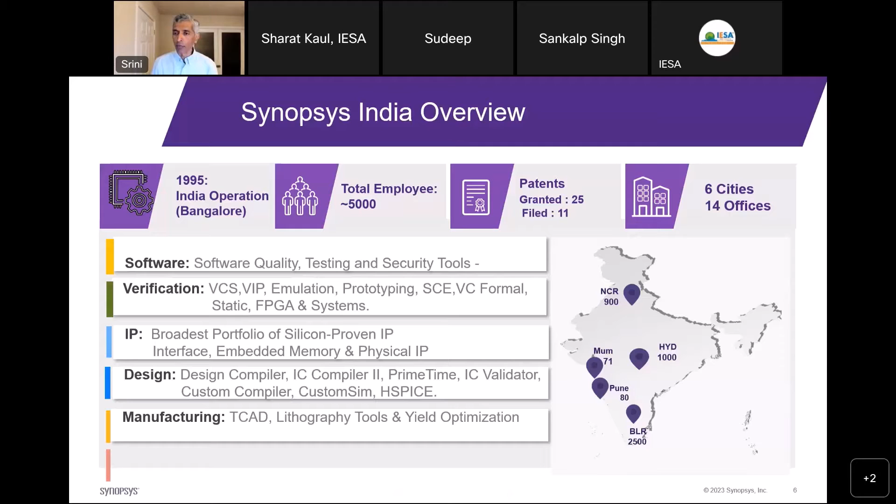You can also see that we have offices throughout India, and we can see the headcount in each place. We are very excited about the contributions that the Indian team has made to EDA and to Synopsys' success. I think it's also appropriate now that Synopsys, in turn, participates in India's new initiative to become a semiconductor manufacturing powerhouse.

The thing that's unique about Synopsys, that will make Synopsys a good partner for all of you considering any kind of manufacturing, is that Synopsys is a full stack supplier in EDA. Everything that you can think of in EDA, you can get from Synopsys, from design capture all the way to silicon manufacturing, everything in between.

And now we are working on what we call hyperconvergence. How do we bring these technologies together so that we can offer a better solution to our customers, and how we can use the power of pervasive AI to make each of these tools better? That's our quest right now. The whole company is focused on this and executing really well on this stuff. And as you begin to engage with us on manufacturing, you'll begin to see some of the benefits of this approach we've taken.

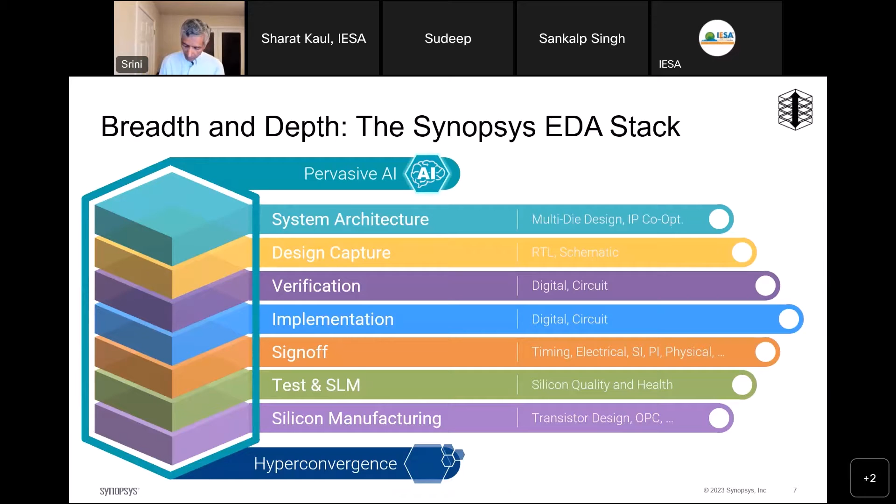Let me tell you briefly about Synopsys manufacturing solutions. It's a very large area, so I'm not sure I'll do justice to everything. But let me just high level tell you that you can think of manufacturing solutions as being composed of four important components. TCAD is number one, and you'll hear more about that. TCAD is what you use to actually develop your process.

Mask fabrication. You know that before you begin to make your wafers, you have to have a mask, and I'll explain more about that. It's a very important, very challenging technology that Synopsys is one of the leaders in, and we'll tell you more about how that works.

Silicon lifecycle management is the process by which you can keep track of your silicon as it goes through manufacturing, but also when you ship it into the field. Even when your customer is using it, you can monitor it and decide what to do to mitigate any potential problems. So that's silicon lifecycle management.

You need that. And finally, you need process control solutions to run your fab efficiently, right? You're now beginning to see discussions of fabs being built in India. The fab is built, it'll require a process control solution because a modern fab costs billions of dollars, and it has several hundreds to 1,000 pieces of expensive equipment, and all of this has to be efficiently managed, and that is done by our process control solutions.

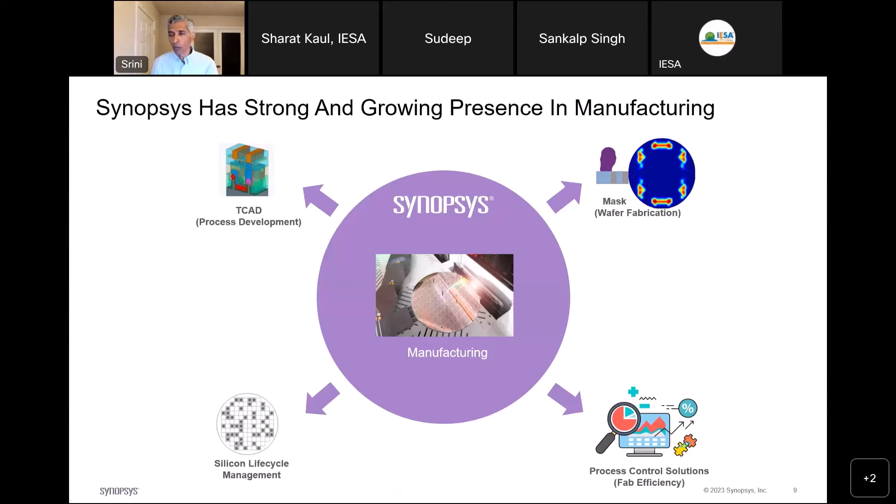So think of this as the introduction to our portfolio of tools to manufacturing, and allow me to now tell you a little bit about how all of this fits together. For most people who have designed chips, and that's the bulk of companies, right? Fabless companies are more numerous. When we think about manufacturing, think about designing a product, testing a product, and then going into manufacturing, right? So let me get my laser pointer so I can point you to what I'm talking about.

So typically, you design your product, you test your product, and then you give it to a fab, a manufacturer, where you have what is known as a product ramp. This is a curve that you're all very familiar with. Almost always, when you start manufacturing your chip, the yield is low, but very quickly it ramps up, and this part is called product ramp. Most people are familiar with it.

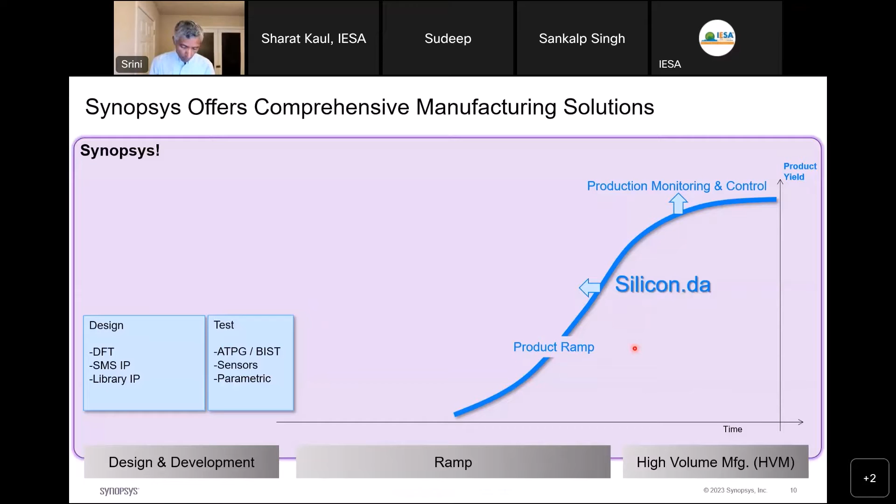But we should be aware of one other thing that is just as important to manufacturing, which is the idea of a process ramp. What is process ramp? The idea is that you actually design a process. By process, I mean something like a 28 nanometer node or 40 nanometer node, silicon carbide technology, silicon, SOI technology. These are different processes, right? And if you are in the manufacturing business, you have to develop this process. That development happens using TCAD, where you can do material design, research, process development.

Then you go into lithography, where you decide what kind of lithography to use, and I will explain more about that in a moment. When you're ready with a process that looks ready for production, you go into the fab, and here you have essentially an inverse curve, because on this curve, we are looking to push down defect density. That is missing from our axis. So think of one axis as being the yield. The more, the better, which is this blue line. The green line is defect density. The less of the defects, the better.

So when you talk about ramping your process, you're talking about bringing down your defect density to the point where, somewhere around here, you can actually begin to manufacture a real commercial chip. Okay, so remember that. There's two parts to manufacturing: process ramp and product ramp. A product ramp is when you take an existing mature process and ramp your product, your new processor, your new GPU, your new FPGA, what have you.

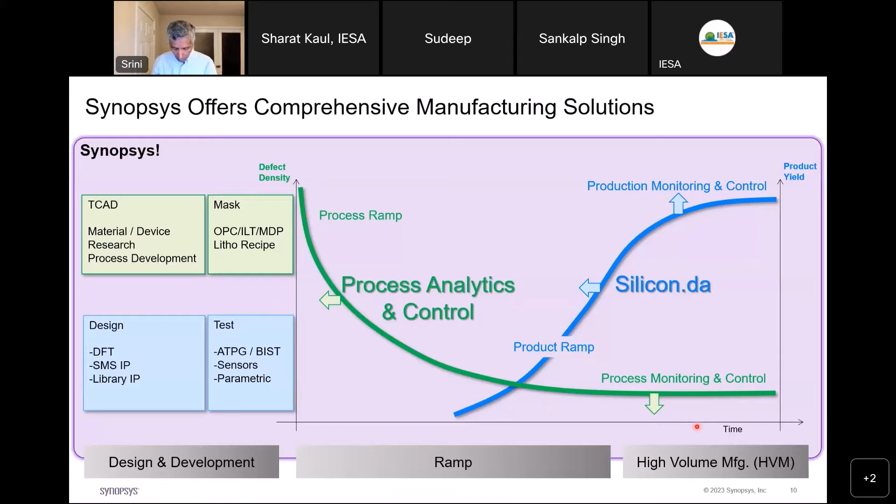Process ramp comes before that. This is when you have nothing. You start with a clean sheet of paper and say, I want a 28 nanometer process. How do I design it? And so then you use TCAD and mask to design that. Okay. So bear with me on this. Hopefully you'll remember this as we go through, because we'll keep coming back to these concepts. So let's talk about TCAD. We mentioned that TCAD enables development of new processes in a cost-effective manner.

Let's take an example. 28 nanometers, right? For most people, that does not seem a very challenging node. Right now, people are designing at 2 nanometers, right? 14 angstroms. It's relentless, the pace at which things are moving. Yet, if today in India we want to bring up a 28 nanometer process or a 40 nanometer process, we'll see that even that is very complex.

Why? Think about a simple planar MOSFET or a simple planar transistor of any kind, and think about all the things that you have to get right to build a 28 nanometer device. You'll see that you'll need a metal gate electrode. A polysilicon gate that you used in the previous generation is not going to be good enough. You need a high-K gate dielectric, because if you don't use a high-K gate, you'll have a lot of gate leakage.

You will have to deliberately put stress and strain into your channel so that you can increase the channel mobility. Otherwise, as the channel becomes smaller, you'll have second order effects that will degrade the mobility of the channel. And you have to think about how to mitigate some of the short channel effects that become more prominent when transistors become small. And all this is at 28 nanometers, which nobody thinks of as bleeding edge.

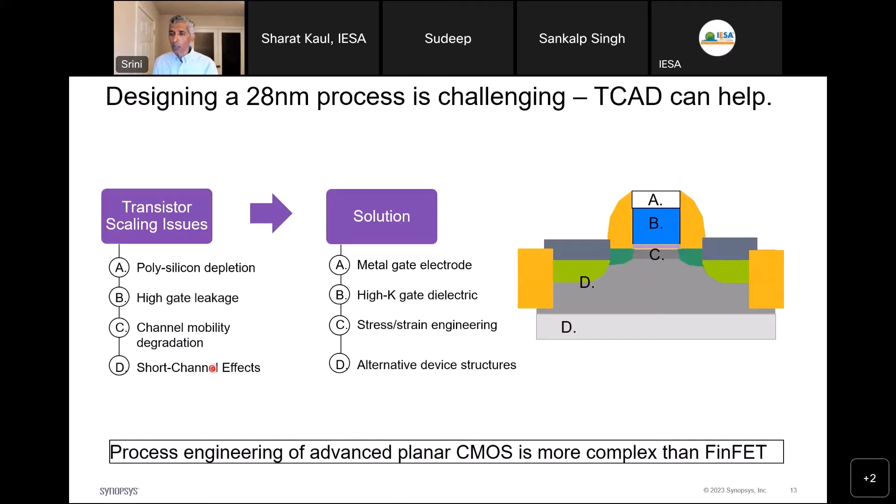So this gives you an idea of the kind of variables that you have to deal with when you're in manufacturing, and why you need TCAD, why you need a partner like Synopsys with a long expertise in this to help you get this off the ground. So, think of Synopsys TCAD as accelerating the process development of both baseline and derivative technologies.

What is a derivative technology? We know very well. Things like low power, right, or higher efficiency, or high performance. These are derivative technologies that you create once you have the base technology working. First, you have 28 nanometer technology working. Then you say, well, I want a low power version of this. That's a derivative. I want a high performance version of this. That's a derivative, and so on.

So each of these derivatives, it's easy for us to say that each of that requires you to go back and redesign your transistor, the one we saw on the previous slide. And if you try to do that by running wafers, it'll be very expensive, as you can imagine, because equipment is very expensive. To put this in context, a single stepper, a lithography piece of equipment, is $150 million.

So you don't want to buy equipment like that and play with it. You don't have time to do research on those machines. You have to do your research even before you begin to go to your fab and try things out. That's where TCAD comes in. So you can do pathfinding research, which is what's known as DTCO, design technology co-optimization. You can do process development, which is what we talked about. You can do process ramp, and you can do high volume manufacturing.

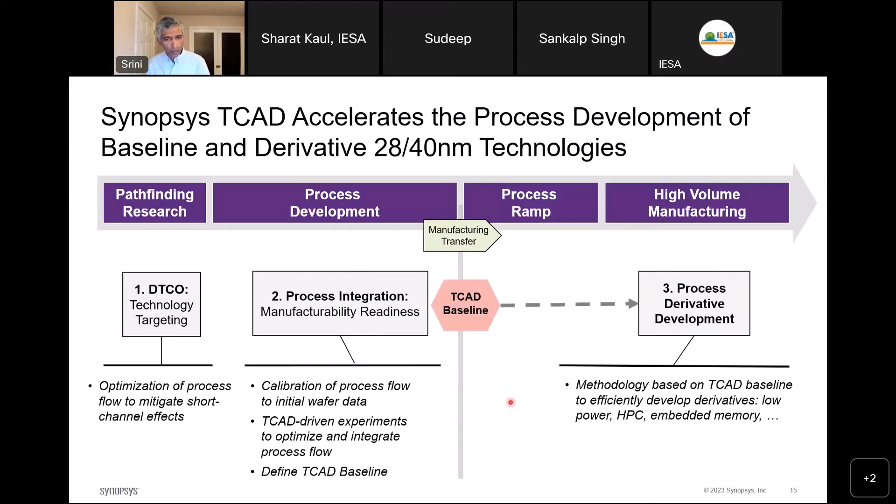Okay, let's look at a couple of examples of that. I have to watch the time because I tend to run over. So I'll invite the moderators to tell me if we are running out of time.

So here's an example. TCAD being used to optimize device performance. What do you see here? TCAD helping you do stress engineering, right? Most of us think of stress as a bad thing, but in some cases it's a good thing. In this case, you stress the crystal, your mobility gets better, and you have to do it just right, which is why you use TCAD, right?

Or you have an ultra shallow junction formation, have to worry about source drains, extensions, halo implants. You can simulate all these things. The key word to remember is with TCAD, you can simulate. You can actually come up with your own device, your own material. Voltage, what is the on voltage, what's the off voltage? All of this you can do by just simulation using TCAD. You can do gate stack optimization and so on.

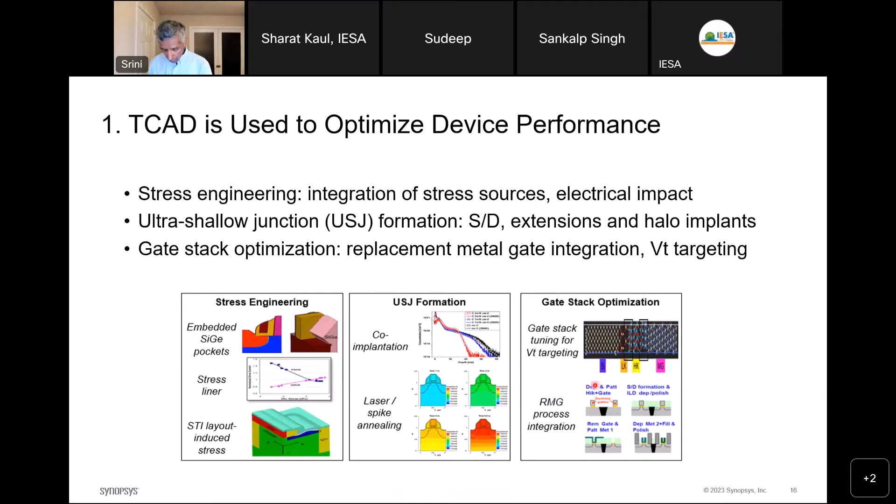So I think you get the picture, right? That with TCAD, you can, and it says here, without running too many wafers. Of course, you have to run a few wafers to validate what you're seeing. So here in this example, you see that, once you do a calibration, which is basically creating a TCAD model, you take a TEM or a SEM image. You know what a SEM is, a scanning electron microscope.

You put your wafer under a scanning electron microscope, get the actual silicon image, compare it to your simulation, see if you're going in the right direction. If not, you iterate, right? So by doing this, you can first calibrate your process, then you can calibrate your device, and then you can see what is the effect of, for example, the body effect. What is the effect of the DIBL on this device, and so on. So that way, you can actually reason about your device before you have run even the first wafer.

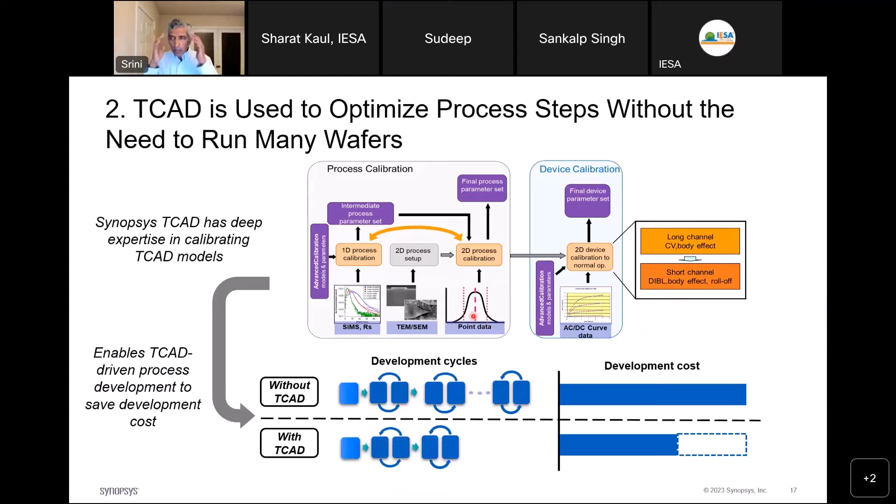That's a tremendous saving in cost, tremendous saving in time, and it allows you to do a lot more what-if analysis. What if I do this? What if I do that? Trying to do all this in silicon is, like we said, very expensive. So if you can remember one thing, it's that with TCAD, you can simulate your process, you can simulate your device, get IV curves. You can even export that into a SPICE deck if you want to do SPICE level simulation using our TCAD. So it's very cool.

And so with TCAD, you can do efficient process derivative development. What I mean with that is you take models and so on, you can explore the process. We have a tool called Process Explorer exactly for that reason. A TCAD tool called Process Explorer that allows you to explore the process. And when you have something that looks reasonable to you, you create a virtual PDK.

With the virtual PDK, you can actually try out your blocks, your standard cell blocks, to see what does the performance look like. What does the PPAC all look like? And with that, you can iterate. So you can first create some optionality. By that, I mean you create several options. And once you have several options, you create optimality, meaning you pick the optimal process that's good for your requirements. And all of this you can do just with simulation. That's the cool thing about TCAD.

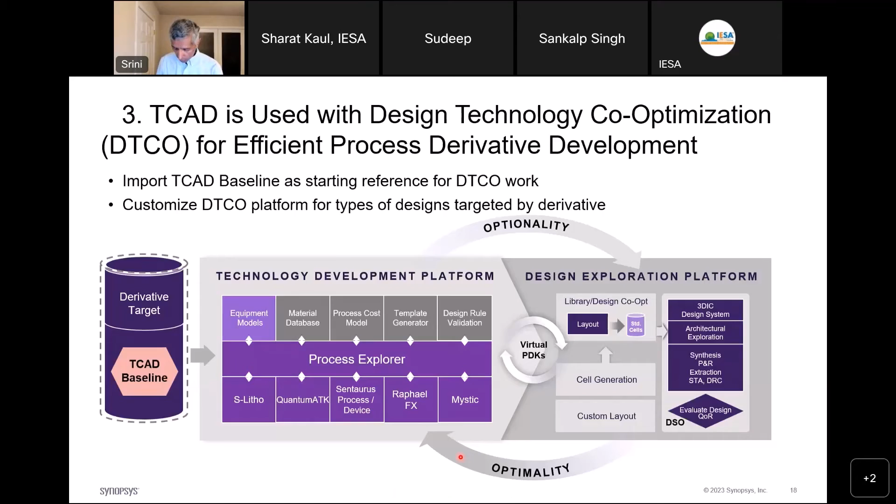And lastly, on TCAD, something that's really hot these days, or really cool, depending on how you say it, is EVs, right? Electric vehicles. And electric vehicles need a lot of semiconductor content. You know that very well. And in this case, specifically, they need power semiconductors, which have a different kind of a profile than your microprocessor or your GPU. In particular, you have to think about technologies such as silicon carbide, gallium nitride, and understand more about not just threshold voltage but breakdown voltage, right?

And so this is also something that with our TCAD tool you can do. We have best practice documents that will help you to get going very quickly.

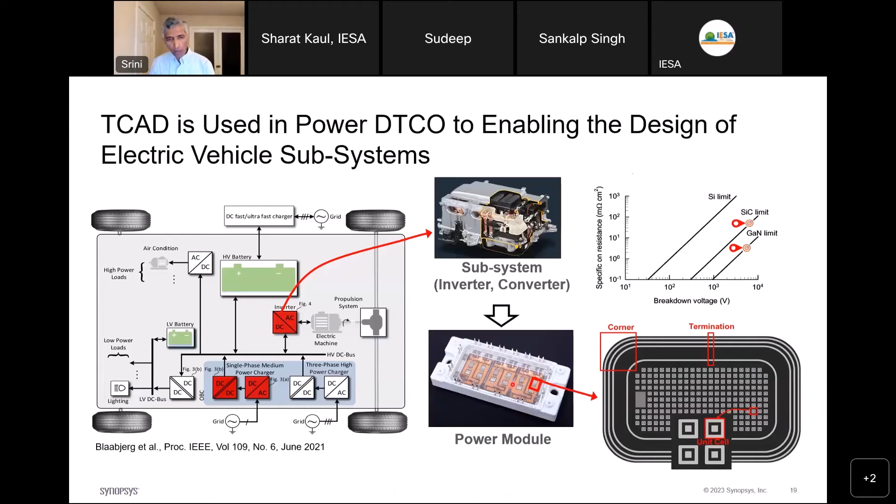So that's for TCAD. Let's talk about mask solutions. I should probably start by saying what is a mask, right? That may not be a term that you're very familiar with, but I'll tell you in a moment. So what do you do with mask solutions? You create a mask from your design so that you can go to volume production. What does that look like?

Think of this as similar to a negative in a photography process, right? Of course, these days, very few of us actually see negatives or think about the classical photography process. But you remember, right? There used to be a process where you would develop your film, get a negative, and then the negative would be exposed to get a real photo, as we used to call it, that people could carry around in their wallets. Now, this is similar to that.

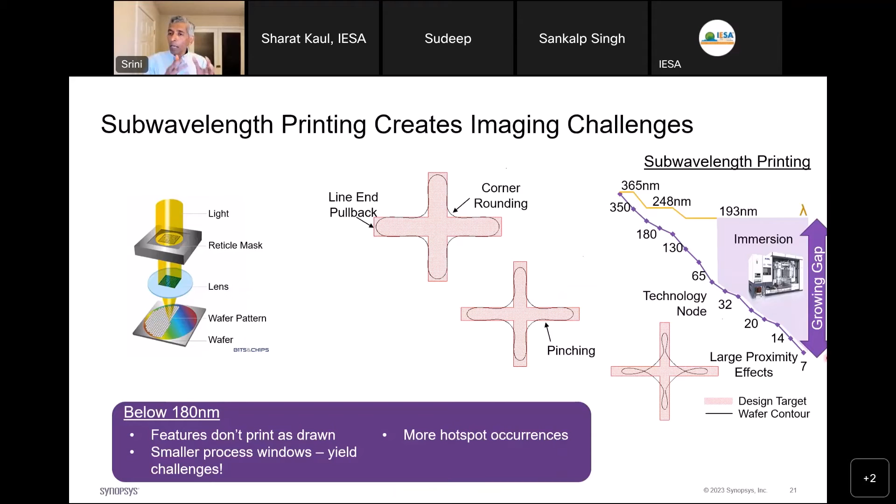One other thing I should say before I move off of this slide is this is stopping at 193, but of course you all have heard of EUV, right? EUV sits somewhere down here because EUV's wavelength is 13.5 nanometers, very, very small, which is why EUV is so much better to make small geometry transistors. You want to make 2 nanometer node chips, you want to make 6 nanometer, 5 nanometer chips, you need EUV because EUV's wavelength is so small, 13.5. But remember, it's 13.5, it's still not 2 nanometers. So you still need the power of mask synthesis to create the masks.

How difficult is this? It's probably the most computationally difficult process in EDA. What I can tell you is that for some of the advanced masks, you can use more than 1 million CPU hours for one mask. That's how complicated this is, because at every point, you're solving Maxwell's equations. You all remember how computationally intensive Maxwell's equations are. You have to solve each of them at every point. And of course, we found some ways to abstract it, but nevertheless, that's the problem.

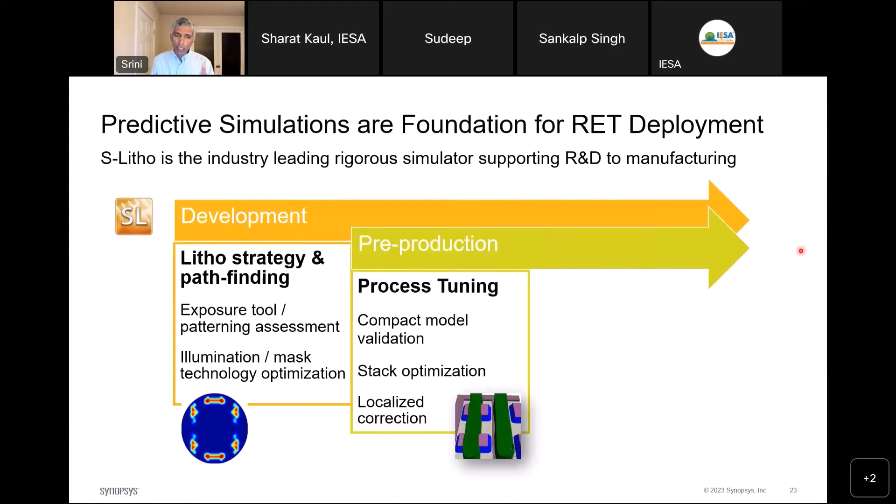And you do MRC, which is mask rule check. And then you actually create the data for the mask, and you then make the mask. That is a full suite of things you have to do to create a mask. And Synopsys has every one of these mature, available, and ready to use.

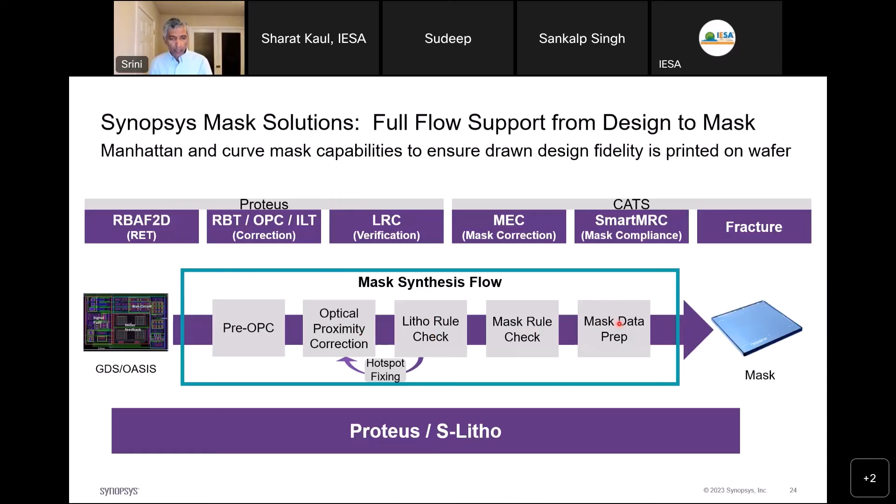Here are some references. We are the golden reference, the market leader for rigorous lithography solutions, used by all leading edge foundries and IDMs. Our OPC is used at the majority of leading memory companies and the top 2 foundries. Our mask data preparation tool is used by essentially most mask shops in the world. And Smart MRC is one of our very strong tools that does your mask rule checking.

So what you see from here is these are battle-tested tools, ready to use with an army of engineers, well-trained, including a lot of them right there in India, who can step up and help you get this going.

Okay, so we talked about TCAD, we talked about mask. We are 37 minutes into the meeting, and we have 2 more things to cover: smart manufacturing process ramp and smart manufacturing product ramp. So I'll go a little faster at this point because I'm running out of time.

So what you're seeing in fabs, now they're called gigafabs, they're huge fabs, is that process complexity is increasing, data volume is increasing, the analysis time is increasing, and therefore the cost is increasing, which you don't want. You want to control costs, right?

So what you want is to move from late detection of problems to early detection of problems to prediction of problems. Remember, we're talking now about yield on a manufacturing line, which is very, very important. It costs $1 billion for you to build this line. You don't want poor yield. That's money being burnt. So you don't want to just detect a problem, you want to detect as early as possible. And ideally, you want to predict a problem coming up so you can solve it before it becomes a problem.

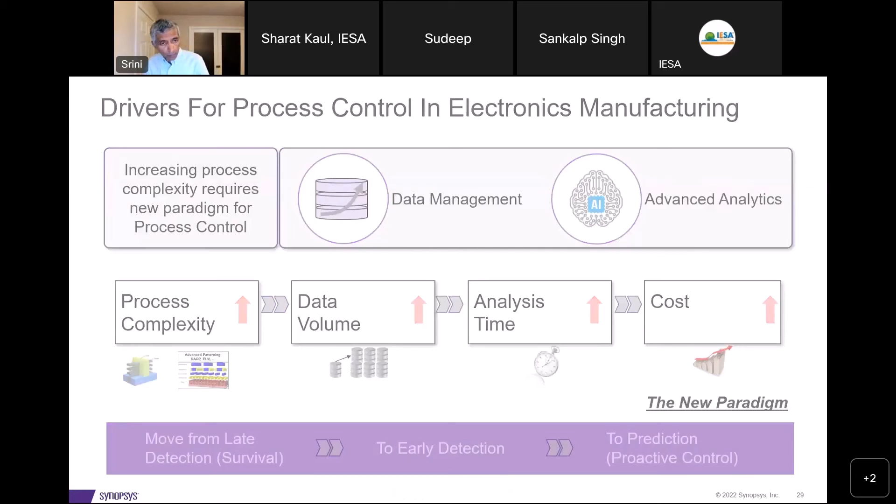And Synopsys has an end-to-end solution for this also. You see a theme here, TCAD, EDA, we had end-to-end. TCAD, an end-to-end. Mask, we had end-to-end solution. For process control, an end-to-end solution. So we can be your one-stop partner for all this stuff.

What you're seeing here is that we can help with process control, with defect management, with root cause analysis, with decision support. Once there's a problem, what do we do? It's a very, very big search space for you to figure out what to do. We are working using AI ML to help you make a decision. Well, the problem is on this piece of equipment, go fix it, for example. And like I said, the holy grail is to go to predictive control, where we see problems occurring and mitigate them on the fly.

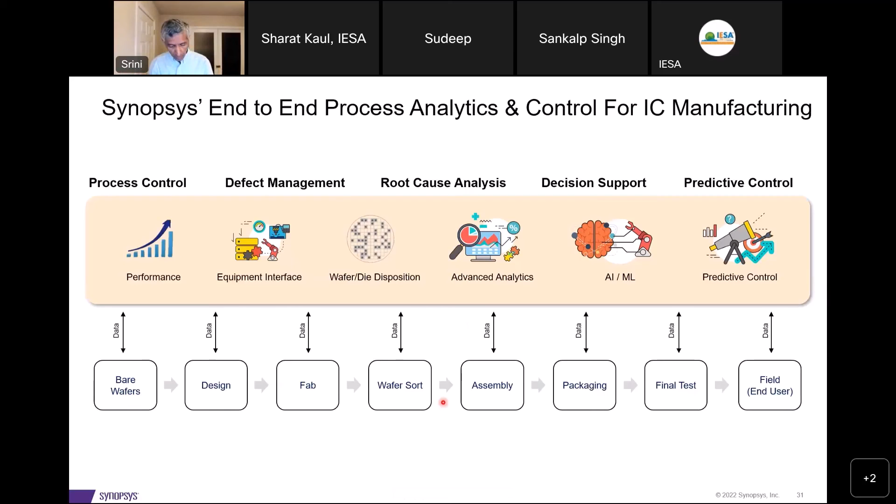So this is our full solution in process control. And we're very pleased that this is also in volume production.

Several of our customers, you can see that in each customer, more than 10,000 pieces of equipment are connected to our tool, which means that we are dealing with petabytes of data. And with one customer of ours, we're dealing with almost 20 petabytes of data coming off the production line, which we analyze, reason about, and tell the customer what to do to keep their yields going and keep the process active.

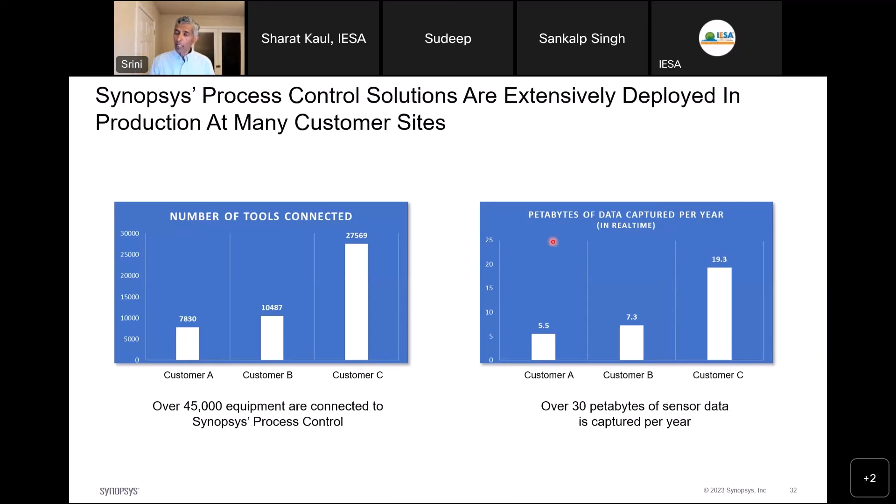Very cool technology, mature technology, ready for you to put to use when you are in need for it.

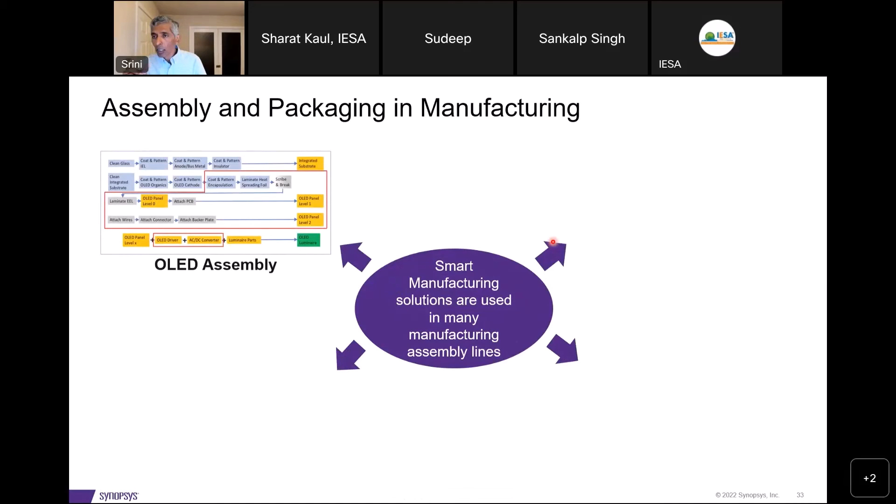And the same process control solution I mentioned is usable not only in semiconductor chip manufacturing, it's also applicable to things like smartphone assembly. I know India now has iPhone assembly factories. That kind of a line can use our process control to improve the process. It's a process. Manufacturing is a process, whether it's a chip, whether it's an iPhone, it's a process. So you can use this tool, use our solution to improve your phone assembly processes.

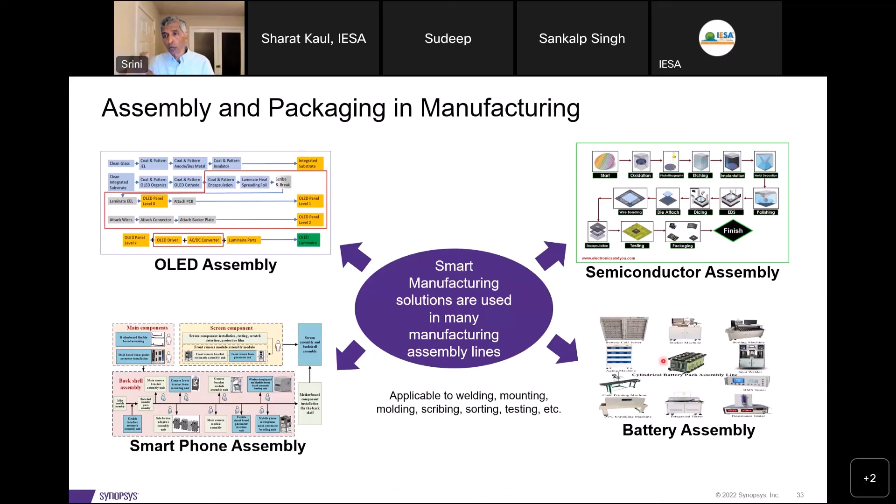You can, if you're working on OLED, which I believe is also the case in India, you can use it for that. Or battery assembly, right? Again, with electric vehicles, batteries are very important. I know India is also very active in battery technology. You can use our technology for optimizing your battery assembly line. So not only is this for semiconductor, but also for associated electronics areas.

Now let me touch on the last of the four pillars, which is product ramp and high volume manufacturing. And here we talk about data analytics and yield enhancement. What is the thing you have to remember here? That things are becoming more complex.

You have not only scale complexity, which means smaller and more, but also system complexity, which means there are myriad kinds of things working together that you have to worry about. You have to worry about packaging, you have to worry about workloads and how to deal with it.

Our approach to solving this is to provide what we call a silicon lifecycle management tool, which will help you in design, in ramp, in production, and even in the field. Even after you made your chip and sold it to your customer, when they are using it in a car or in a data center, if they want to monitor the innards of the chip, so to speak, that's possible.

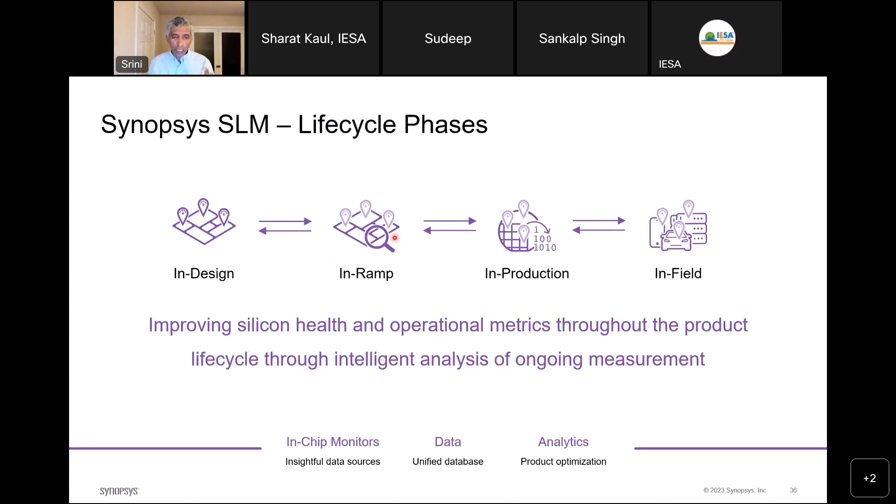Because with our technology, we provide monitors. These are like probes that you can insert into your design when you're designing your chip. And we provide a database to access the data, and analytics to analyze the data to see what's going on with your chip, whether it is in ramp, in production, or in field. Let me explain that in a little more detail.

The fundamental thing is during design, you have to insert chip monitors. Once you do that, you are able to extract data. And you may say, what kind of data? It can be temperature, if you want to see how hot your chip is running. It can be voltage, it can be current, it can be some reliability metric. All of this can be extracted from the chip just using the same IOs that you use for anything else.

Put it in a data store, and then you can bring the force of our analytics solution. We have a sophisticated analytics tool that'll analyze this data and then provide you feedback so you can act on it. So you know that if your chip is running too hot, you can probably turn down the voltage or the frequency if that's what you choose to do. Or you may have some other mitigation technique.

Or if this is out in the field and it's showing a reliability problem, then you can proactively tell your customer, hey, this chip might fail, why don't you bring it back so we can analyze what's going on with it. So this is the idea of silicon lifecycle management. You can insert monitors or probes up front, and that'll allow you to analyze the health of your chip, let's call it that, no matter where it is.

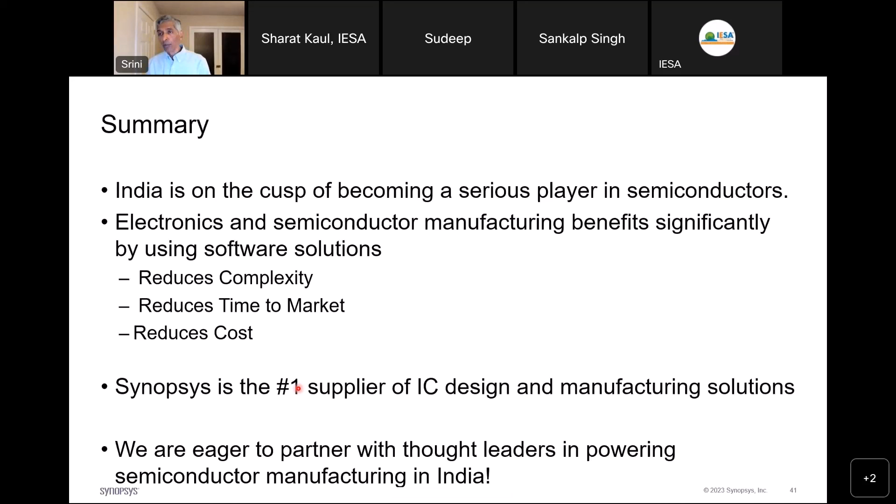So we are eager to partner with thought leaders like you. That's why you're here in the seminar. You are the thought leaders for India in powering semiconductor manufacturing in India. And we all look forward to working with you and making this successful. Thank you very much for your time, and I'll be very happy to answer any questions you might have. Thank you.